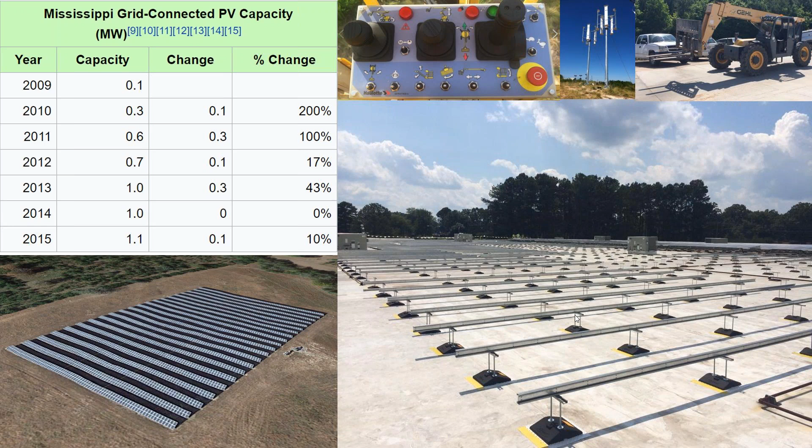Just some background on myself. I got into solar in 2008 in residential contracting, in a market in Austin, Texas that was kind of gangbusters. This was in the era of what I think is probably excessive solar subsidization.

As a case in point, one of our customers did a residential project in Austin about 4 times as big as the solar array pictured, like an 11 or 12 kilowatt array back in the heyday of solar subsidization. We sold the array for about $75,000. The city of Austin cut a check to the homeowner for $48,000, and the array with a 30% tax credit came with a $22,500 tax credit. So out of this $75,000 project, the customer really only paid about $5,000. When you look at the asset value alone of the array, that customer received a return on his investment before the solar array generated a dime of electricity.

In the solar industry, we would call that an easy sell, but it's also too much of a good thing. What happened in the city of Austin back in that era is they would open up their rebate program for one day only, and it would be a mad rush to get in an entire year, maybe a year and a half's worth of projects. You'd have to have it all wound up on January 1st. And if you didn't shove the application under the door at the right time when the clock struck 8 a.m., you might lose out on a year and a half worth of business.

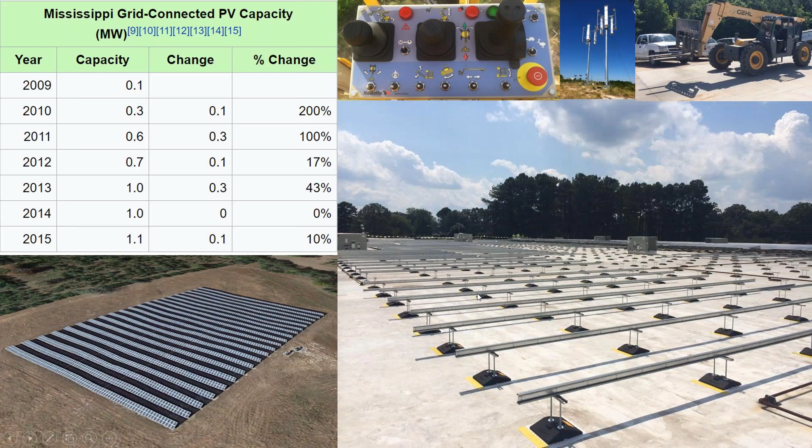And then when we understand the circuitry, we'll realize that most mainstream electricians are already familiar with the hand skills and circuitry involved. So it's really the design phase of solar that has been poorly neglected due to this subsidy process. In order to transition the solar industry from a specialty, turnkey, high margin scope into something that is just installed on all homes to recoup your electricity use over a long period of time, wrapped up into your project financing so that it's cost effective...

To do all that, especially with these rising import tariffs, we have to make solar cheaper. We have to work harder. And so to do that, we have to take a dedicated look at solar design.

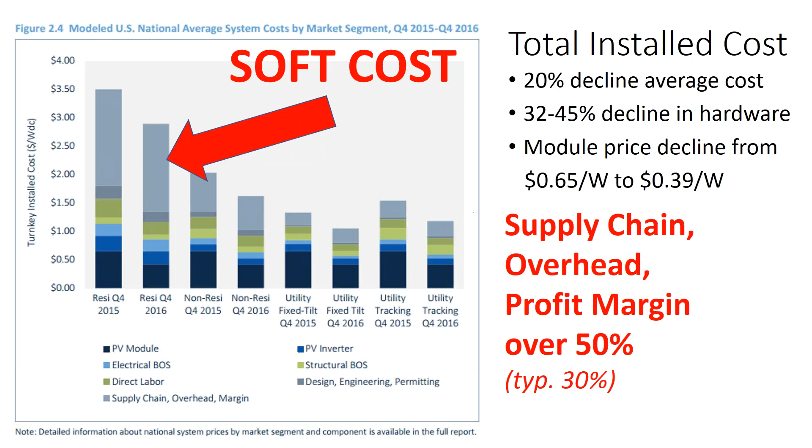The first is the impact of the tax credit. The tax credit was originally supposed to expire at the end of 2016. So what was thought was that developers would take projects out of 2017, 18, and 19, and maybe even delay some projects in the years leading up to it, and install everything in 2016 to get that tax credit and take advantage of declining material costs as well.

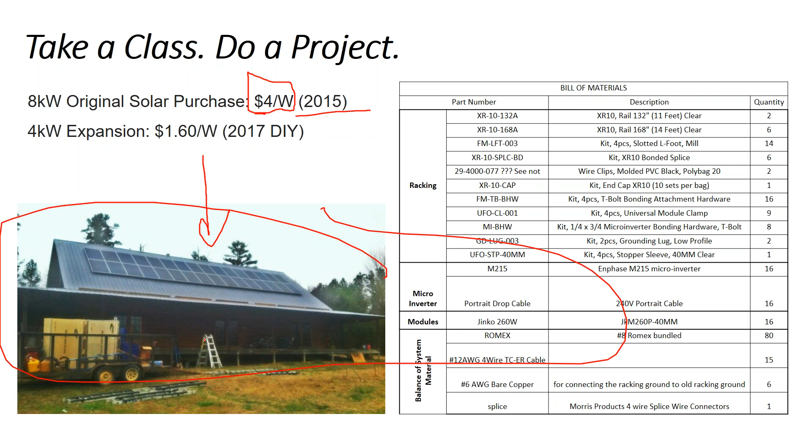At the same time, the guy who owns this array is very handy. He built his house as a kit, installed his own air conditioning system. So he said, well, I only have the money to do an 8 kilowatt project, but I have the electricity use to do a 12 kilowatt project. So can we design the array for expansion?

What we did to make the array expandable is we designed it as if there were another row of modules, so we left enough space for expansion. When we did our internal conduit run back to the point of interconnection, we sized the conduit and the breakers. If you were really fancy, you'd just go ahead and run the cable up to the roof for that expanded circuit. We didn't do that, but by making sure we had the breaker slots, the conduit sized, and the conduit run accessible for a retrofit, we were prepared.

A few years later, the owner called me - I was no longer working for the electrical company. He said, I want to expand the array. I went over to his house and we came up with our material list. It was a little bit hard because we were a few years out, so we had to go back and find modules that fit the aesthetics of his original array.

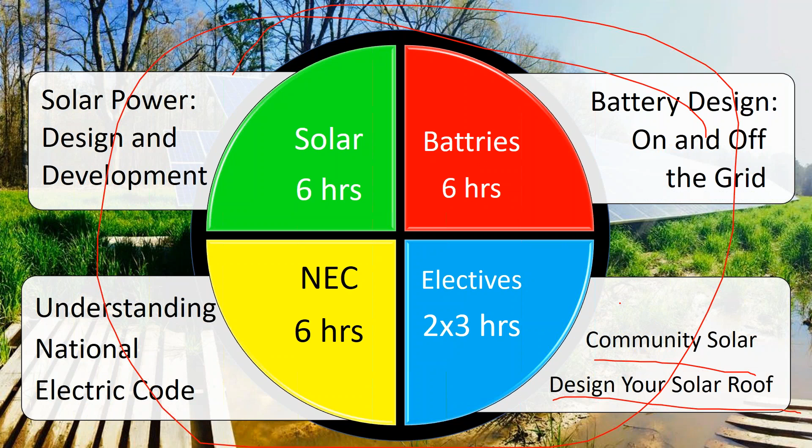To be perfectly honest, after I went through 4 years of mechanical engineering at the University of Pennsylvania—they have a robotics lab that's really good, not quite as good as MIT or Caltech or the real electrical engineering schools, but they get their DARPA-funded robots, and they do drones and computer recognition and all that.

And I got my job in the oil industry as a control systems engineer, designing control valves, but it's still very basic electrical scope. I still at that point did not have a fundamental grasp of what exactly a volt was or what exactly an amp was. And I didn't know anything about National Electric Code, so maybe I could do array layouts and get everything to match up. But while you can teach yourself general PV system knowledge, it really takes working in the trades to have a great grasp and comprehension of National Electric Code requirements and the theory behind it.

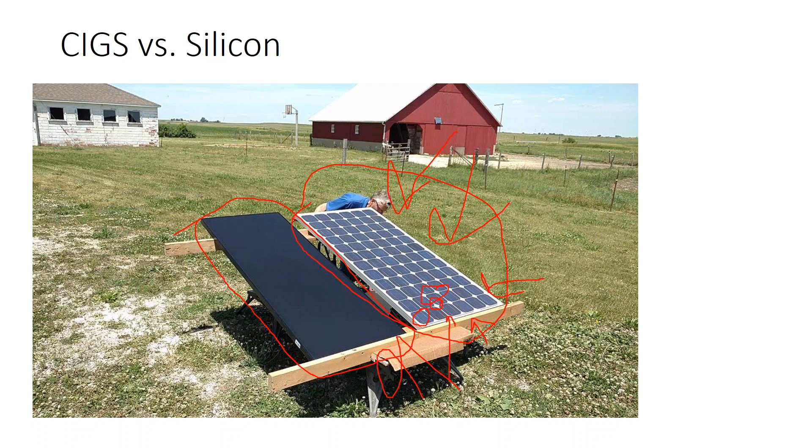You have this silver frame, blue cells, and then a white supporting substrate, which is a plastic sheet. Instead of a silver frame, you could have a black frame - it's anodized silver, but can be anodized black for hardly a difference in price. Instead of a white back sheet, they can have a black back sheet, and what that effectively does is hide the cells. We'll show a better picture because this one is kind of misleading. The CIGS panel is a more universal cell going all the way from the top of the module to the bottom - it's just that silicon has won the economic battle.

So we'll talk about some aesthetic differences in just another slide or two. But essentially, when you look at different module technologies, the vast majority of the market is either monosilicon or polysilicon. The difference being with monosilicon, where you have these cells - it's a little confusing, but you get a cylinder of silicon. And this is not actually a cast in place ingot, it's actually a crystal, like growing a crystal in your bathroom at home, a science kit you would play with as a kid.

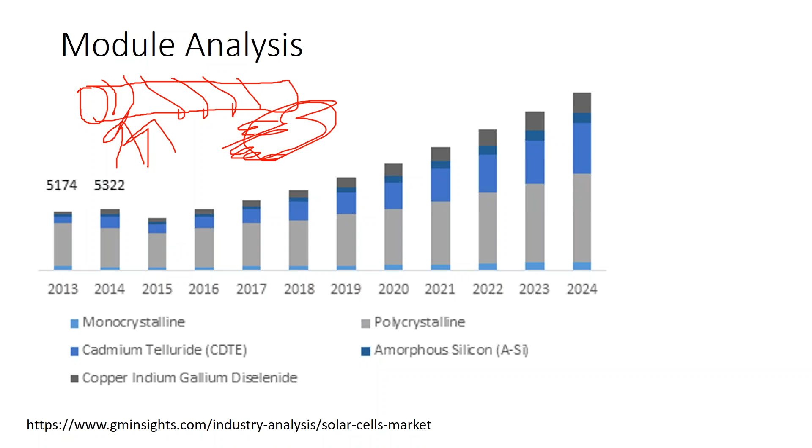This is a vat of liquid that has some stripped out silicon ions into it. In your upstream refining process, they grow a single uniform crystal of silicon, and then they slice it up. That creates a very pure cell, which is great for quality and efficiency, but it also produces a lot of sawdust, so that's not particularly good for cost.

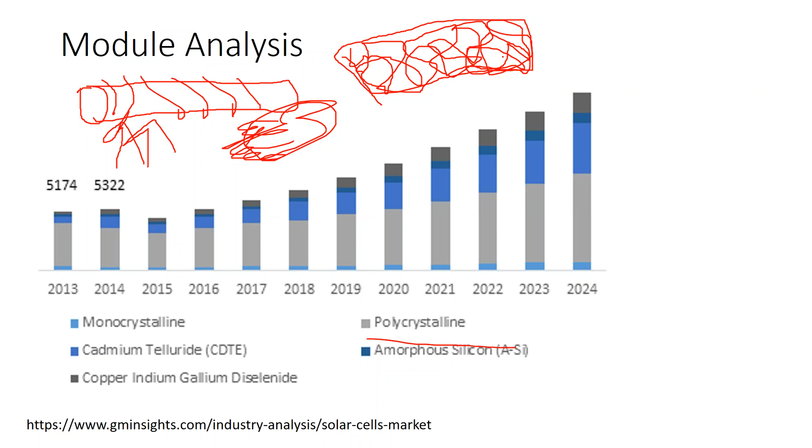Polycrystalline is a little bit different. The vat of ions that they use to grow the cell is actually a sheet or a tray, and the silicon just kind of grows in a square sheet, but its grain boundary is all random. So they might have a fleckled appearance, usually a lighter shade of blue, and they're just slightly less efficient than monosilicon.

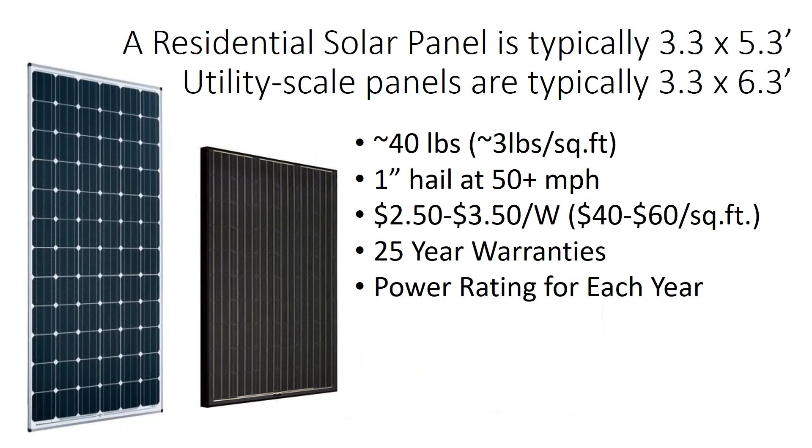But then again, when they slice and dice the sheet, it's more like a square pizza instead of a pepperoni, so it's less material waste. Additionally, with a square cell, they get rid of these little diamonds, so they can fill in more space on the module. The end result is the efficiency of polysilicon is not that much different than monosilicon, because even though it's a lower efficiency cell, it covers more surface area of the module. So the net production difference is very close together, and the manufacturing process is cheaper.

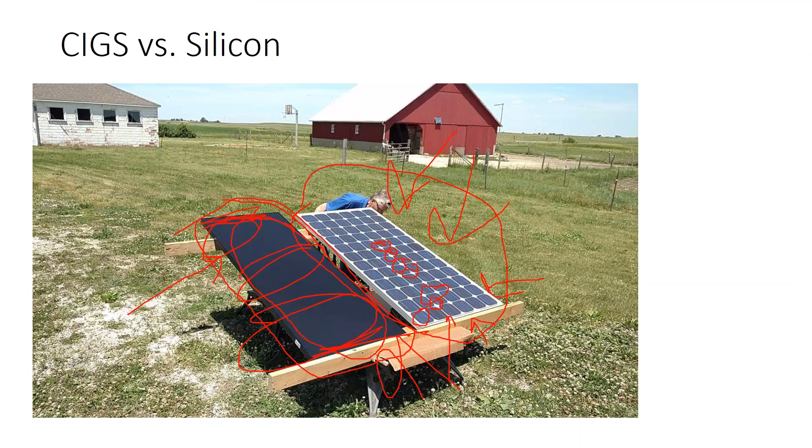Polysilicon is the dominant market, but monosilicon is still catering to what I would say is the United States market, where consumers will be able to afford and pay for a higher quality cell. And then maybe the cheaper polysilicon is what they're buying in Mexico. Because if I'm going to go through the process of doing an import tariff on my module, I might as well go for the most space efficient module possible, the one that's going to be top quality, because if I have to overcome these upfront costs, I'm only going to do that as far as a long-term project goes.

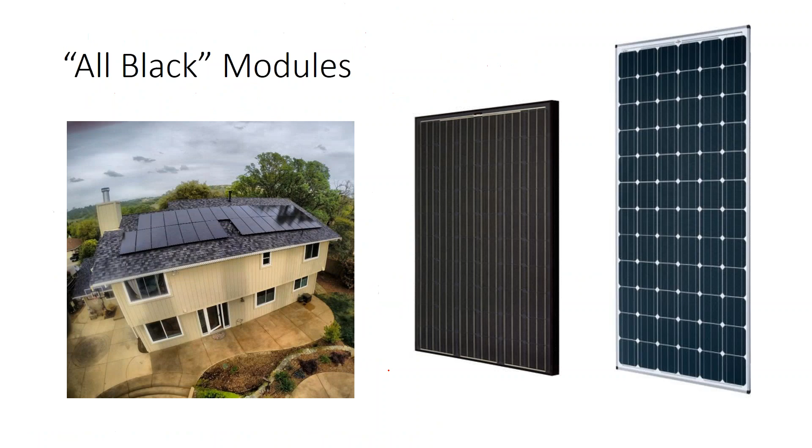I don't really care about monosilicon versus polysilicon versus other kinds of module technologies. What is more important in my mind is aesthetics, which is neglected. I think aesthetics are particularly important for residential arrays because when you deal with 10 or 12 year paybacks, you might have a transition in ownership in the house. Or you might be in a market like Mississippi where the energy savings is so low and the market is so small that the install costs are so high that the national average might be a 12-year payback for solar. In Mississippi, it might be a 15-year payback or even a 20-year payback if you just look at what you spent and the money you get out of it.

Residential home value is not that refined. It's not going to appraise your solar array in the same way that a CPA might assess the cash flow of an investment. Instead, when it comes time to sell your home, the amount of value that the array adds to your home is not the net present value of the remaining electricity left in the array. The value that the array adds to the home is set by what the new home buyer will spend on the home above and beyond what they would normally spend because it has solar.

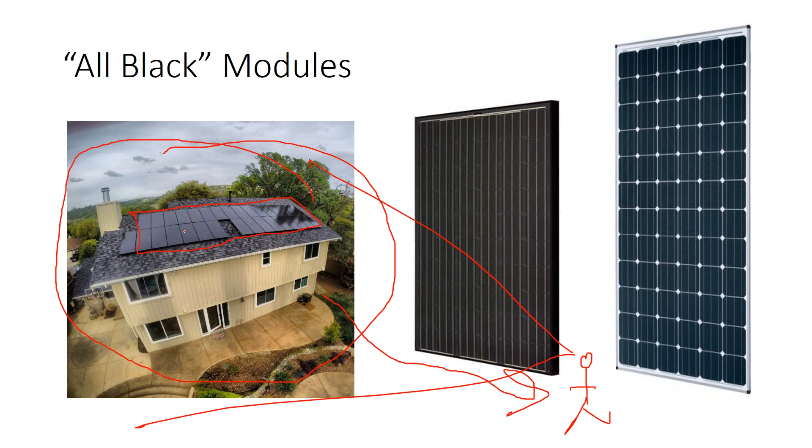So we can see that this designer has tried to do everything right. They got all black modules, they got an all black frame, they have a nice even polygon. But what they missed out on was this black plumbing vent poking through the roof right there - you can see some other black vents. The designer of the home is obviously interested in aesthetics, but the solar designer missed that black vent. So you can see the install - the module was supposed to go there, and instead they kind of tacked it on to the end. So they took what would have been a perfect array and made it look like it needed a trip to the orthodontist to fix.

In general, when doing residential arrays, what's preferred are what are called all black modules, where they take that metal frame and make it black, and take that back sheet and make it black. What that does is it has a muted effect on the metal lines and the circular cells, which you can kind of make out in this picture - they're there, they're just hidden. So generally when I'm doing residential, I'm doing all black modules because it looks better.

Not always - I kind of miss the aesthetics of these monosilicon silver frame modules. They look really good on metal rooftops, with that blue and aluminum, where the aluminum kind of matches the color of the metal of the steel roof. But I'm a solar junkie, I love solar panels, and as they say, black never goes out of style.

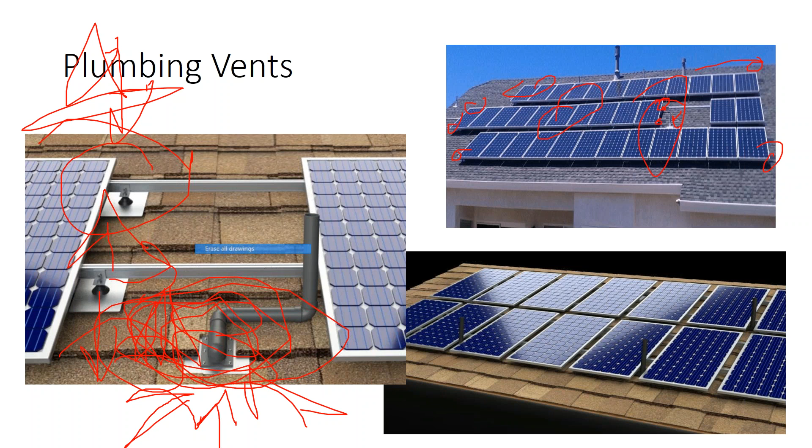So then there's a second reason why we have plumbing vents, and that second reason is that you will have some sewer gas go up the vent rather than down into the sewer. The code on the plumbing vents is such that gas goes up into the air instead of collecting on the rooftop. And maybe instead of going up, it might go down the roof and into a window. So we give this elevation a little bit of distance, a little bit of a gap, to keep it away from entering the building.

Maybe there's a slight corrosive effect that putting a plumbing vent directly underneath a solar module could have on that module. To me, the aesthetics are more important than one module being corroded because of gas 10 or 15 years down the line. If that happens and there's a fault in that module, we'll just replace the module.

No big deal. But on top of that, now there's another option that did not exist before the solar industry. Now we have a vent system where you can cap, flash, and seal this venting system, where you cut the top of the vent off and replumb it out the top of the solar array. Replumbing a piece of PVC pipe up on a rooftop is a very simple task.

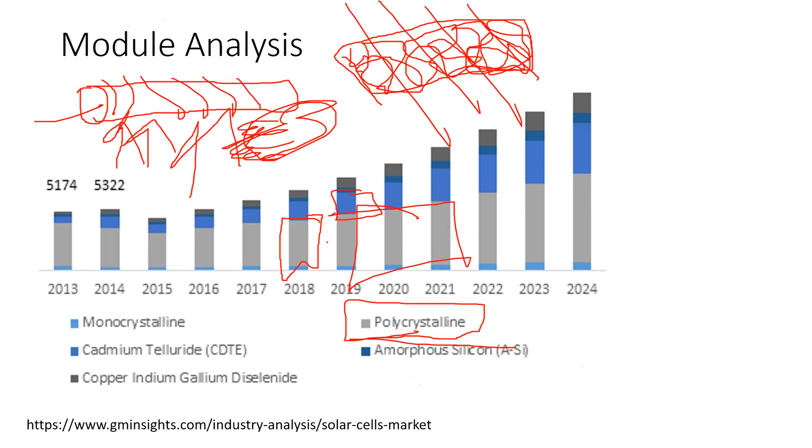All the snow begins to slide. Now you have an uneven weight distribution where there's more weight on the bottom of this array than there is on the top of the array.

So when you're in an area of heavy snow, what you want to do - and we have some slides on this a little bit later, so I'll just state it briefly here - is reinforce the attachments along the bottom of the array. Instead of going every 4 feet, put a new attachment in. On the very bottom row, you may just want to do every 2 feet, so that there's less weight per attachment. Because when you get these heavy snow mounds, the failure is that you get so much weight up on the array that the bottom rail crushes through the roof deck.

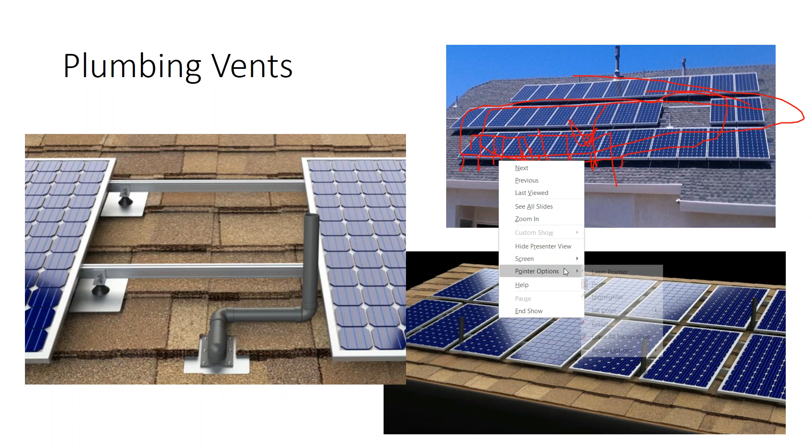That can be easily addressed by just adding a few more supports, which the solar installer doesn't really want to do, because that means higher material costs and more time spent on the roof, and they're not roofers. They're being asked to identify where there are rafters underneath the roof to anchor to. And they know that, unless the building is built perfectly, under a retrofit they're going to be putting down some attachments that aren't going to go into the rooftop.

And that's no big deal when you miss a rafter. You have your sealant gun with you, so you do what you can not to miss. First off,

there's a couple of different techniques, but basically the installer is going to be tapping the rooftop, measuring off 2 feet on center, and then realizing if they got something wrong, because you can feel it. The attachment doesn't bite into the rafter; it bites into the decking, and it'll wobble a little bit more. That's all right - you just remove it, seal it, and hopefully get it right the second time.

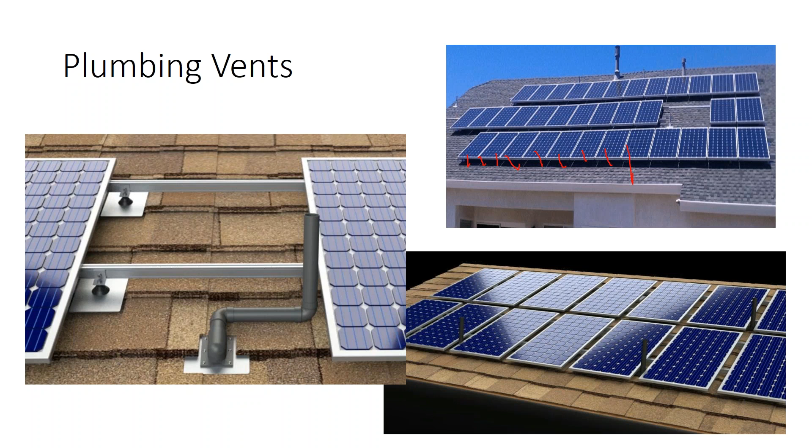But they don't want to do that every 2 feet on center across the rooftop. And because there's very little structural oversight of residential systems in particular, that can get skipped over. Then only in areas of heavy snow does that become a problem.

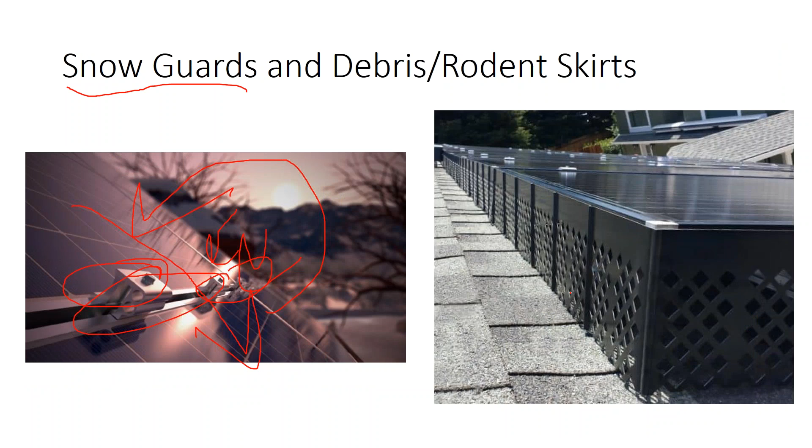Rodent skirts are another thing that your solar project financiers don't want to spring for. It's like, okay, we're doing a $30,000 solar project and the surrounding trees are riddled with squirrels, but you don't want to spend the extra $400 to put an array skirt around the array to prevent the squirrels from getting under there. Some of that stuff doesn't make sense.

And that's where maybe a quality installer can distinguish themselves. Most solar installation companies do not use array skirts. The developer I'm doing projects for, I can tell them in the site evaluations, the customer shoots squirrels off of his rooftop with a BB gun, and they still don't put it into the budget.

I'm working on my own system. It might be that the array skirt systems all come from bird guards, and squirrels are a little bit more industrious than birds. So maybe the array skirts on the market are not very good.

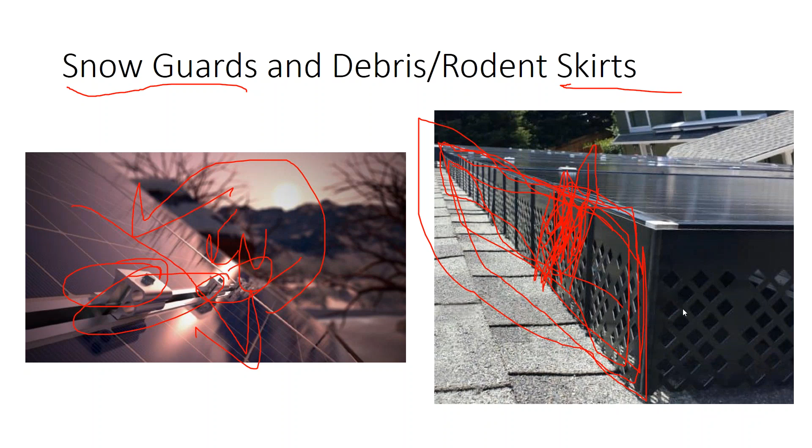What I'm experimenting with is just cable trays, metal screens, locating the wiring underneath the array, and orienting the modules to fully enclose all the roof-mounted wiring and electronics up on the rooftop rather than defending the perimeter. A squirrel might be able to peel one little panel off, and now they have a mansion they can live inside of. So maybe the developer is saying, since we can't fully beat the squirrels, we're not going to do anything about it. There's definitely still some room for product innovation in the industry on that.

But generally, you're going to want to put in an array skirt if you already have squirrels on the rooftop. Well, if the squirrel chews on a wire that's hot, aren't they going to learn very quickly not to do that? Well, yes, but at night there's no power in the wires. They could completely chew up your entire solar array, and I've seen it happen before. It's not a fun process to fix.

Okay, what about the module warranty? I always take module warranties with a grain of salt, because solar is very reliable. The International Space Station is powered by solar, and I'm pretty sure a service call in outer space is quite expensive. So sometimes you can see solar being attacked as if it's not reliable, but solar is very reliable. The sun is going to be here much longer than the Earth, so we know the sun is there. The weather, the volatility of production can vary, but the reliability of solar is very good.

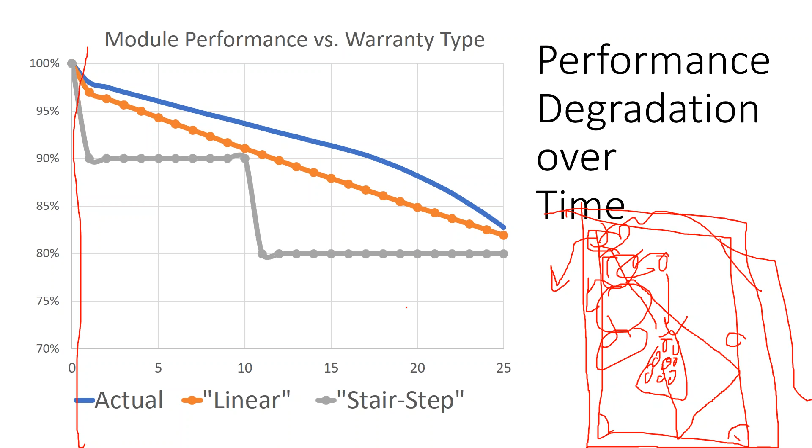Not enough to electrocute you, not enough for you to notice, but enough to drag down module performance over time. So manufacturers have not only put in a bigger gap between the cells and the module frame, but they've also fixed the inverter grounding, so the degradation is not as apparent as it used to be. In your worst case scenario, solar modules installed from 2008 to 2014 would see as much as a 5% loss in the first year.

And the way we wire our modules, sometimes that 5% loss in one module can reduce the whole system by up to 5%. So a lot of that year-one degradation has been addressed.

Now from year 2 to year 25, you have a different kind of degradation, and that has more to do with the build quality of the module, how weatherproof it is. Even if you have a module with a glass top and a plastic back with the cell wedged in between, versus a glass top and a glass back with a thinner cell, that's a tighter build quality.

So they say our thin film modules are more weatherproof than our silicon modules, and so they'll have less degradation. That can be true until they eventually begin to degrade. And sometimes if something's supposed to be weatherproof and it isn't, at that point it can degrade faster than something that's a little bit more breathable.

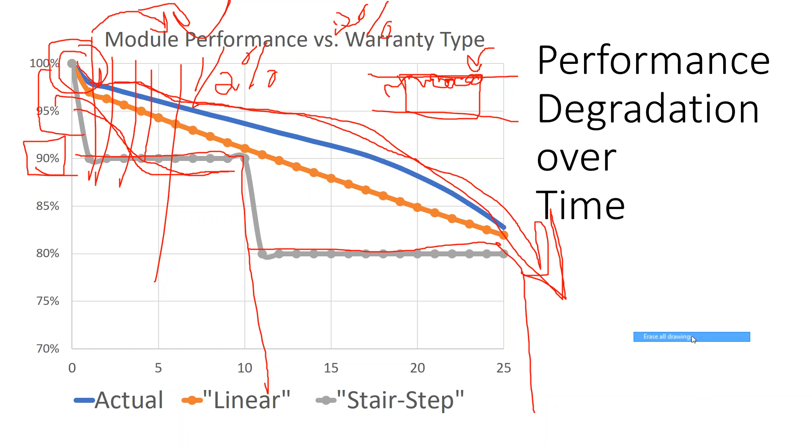Because I guess the danger is this year-one degradation where if your module degrades by 5% in the first year, but you only have a 90% year-one warranty, you're not going to be able to service that warranty until year 8 or year 9 when that degradation finally dips down below where it's supposed to be. And that's really, not only is that tedious, it's incredibly rare. So it just doesn't happen.

So when I'm looking at module spec sheets and I want to determine which manufacturer has better finances, which manufacturer has a better product, generally I'll look at the warranty. And so if they give me a year-by-year-by-year warranty, that makes me more comfortable. I say, okay, well, if there is a problem, I don't have to wait until the manufacturer is out of business for it to trigger the warranty.

But again, it's almost doing you a disservice to spend time on this stuff, because most of the time the warranty issue is way off the chart, at like two-thirds of what the module should be doing. So whether or not you have a year-over-year warranty or more of a stair-step warranty, on the one hand, it indicates quality. On the other hand, the warranty really doesn't matter that much, because in almost all cases either a stair-step warranty or a year-over-year warranty is going to be perfectly fine to have the warranty event trigger.

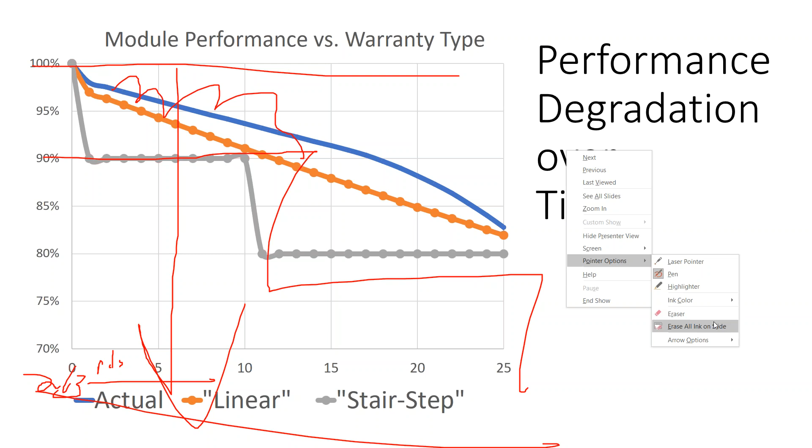And then it becomes just a problem of, well, is the premium for the premium module actually worth it? If you're really never going to use the warranty anyway, it's just going to be cheaper for all parties involved to have one extra solar module in case something happens to one module. If something's happening to all the modules, you're going to scrap the array anyway. So how you economize the warranty, you have to take that with a grain of salt.

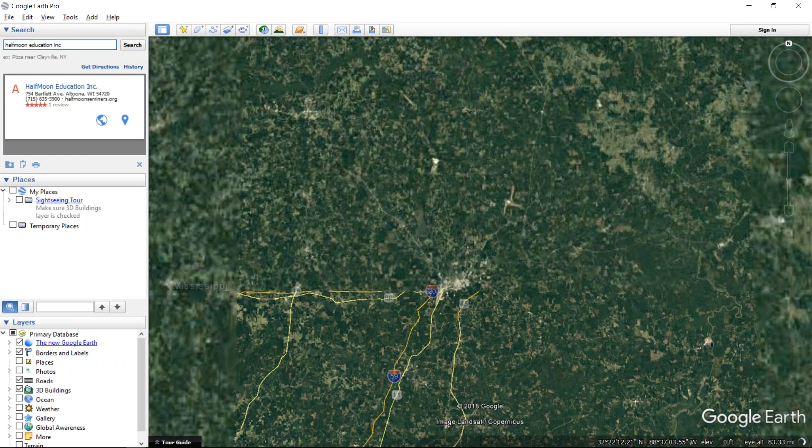Just as an example, here's Google Earth, and we'll put in HalfMoon. We'll go over to HalfMoon's project site, and Google Earth is very accurate. I can look at this roof and say, okay, here's a little penetration, a little vent here. If I wanted to know how big these skylights are, I can take the ruler tool on Google Earth and click there and click there, and that's about a 3-foot skylight or so. So I can measure how far from the edge of the roof the skylights are.

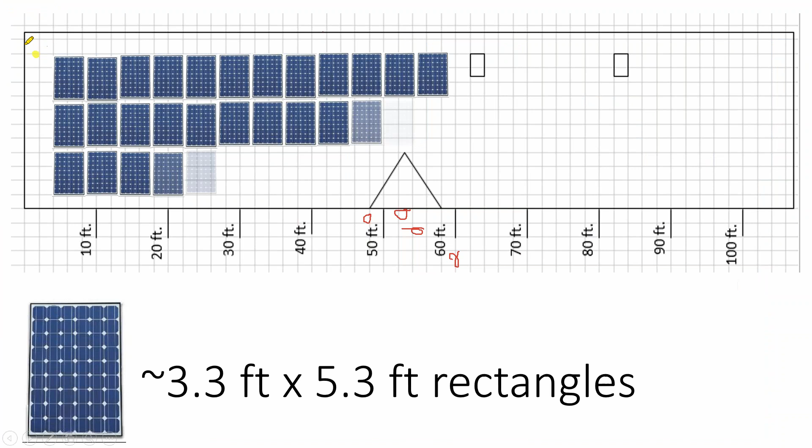I can measure and say, okay, this roof surface is 107 feet long. The entrance to the building is 52 or 53 feet from the left, and the building is about 53 feet from the left and about 54 feet from the right. You can measure out your roof dimensions, but because we're staying away from the edge and giving ourselves a little wiggle room, even if your dimensioning on Google Earth is off by 6 inches, if you give yourself space, it's going to fit.

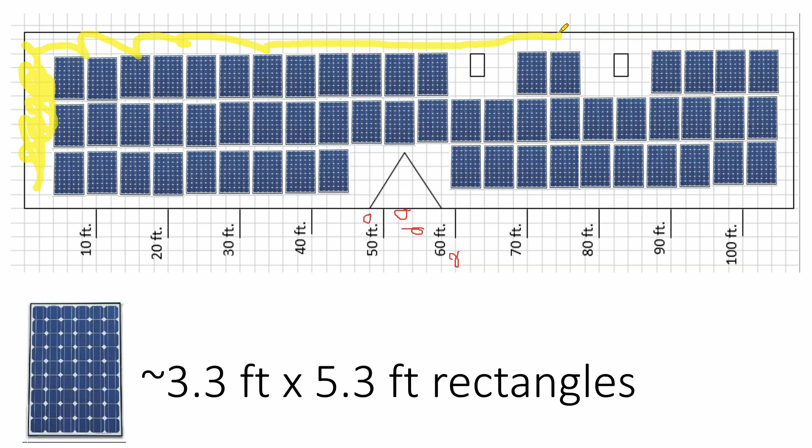If you're trying to use up every single square inch of rooftop, it might not fit and you might cause a mistake. So I really like using Google Earth. I'm a big fan of remote site evaluations, not visiting the site until I'm ready to construct. Google Earth, as long as you're not being aggressive in your design, is perfectly sufficient for that.

I like using Google Earth to estimate tree height. How do you do that? In Google Earth, not only can you measure out the roof, you can measure the length of a shadow. We can see pretty readily that with the HalfMoon site, there are no trees around, but we might want to say, how tall is the building? I can see the length of this shadow here. In terms of building height, I can even see that this part of the building is a little bit taller than that part, and that shadow is a little bit longer than that shadow. So how do I convert shadow length to the height of the building or a tree?

Down here in the bottom, I can't really make it any larger, but I actually get the date that this image was taken. So if I turn on, Google has a 3D view for 3D buildings. I'm not sure why, but usually when I click this 3D layer, it changes things. Let's take it off and put it back on. I guess that's a moot point.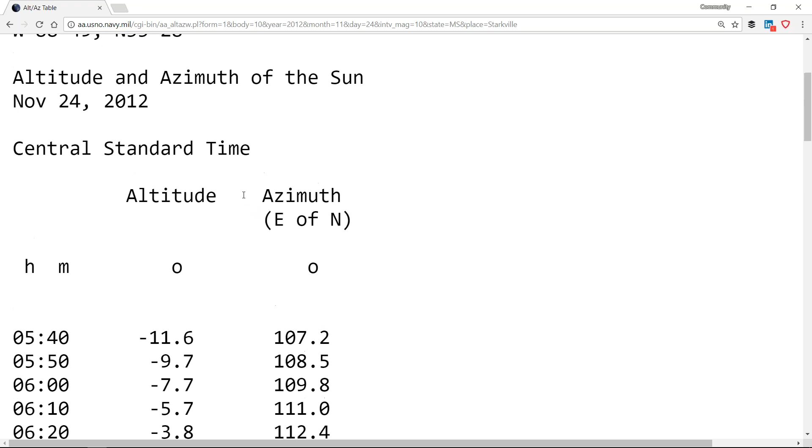I've measured the shadow to be 80 feet long, then I'll go to my sun angle azimuth chart and put in the date the Google photo was taken, November 24th of 2012, and put in where I'm living right now, Starkville, Mississippi. I'll click compute table, and here's a chart of where the sun is for every 10-minute interval in Starkville, Mississippi on that date.

So if I know that my bearing is 160 degrees, I'll look at my sun angle chart and scroll down to 160 degrees. This Google Earth photo was taken at 10:30 a.m., and the sun was 33 degrees up in the sky at that time.

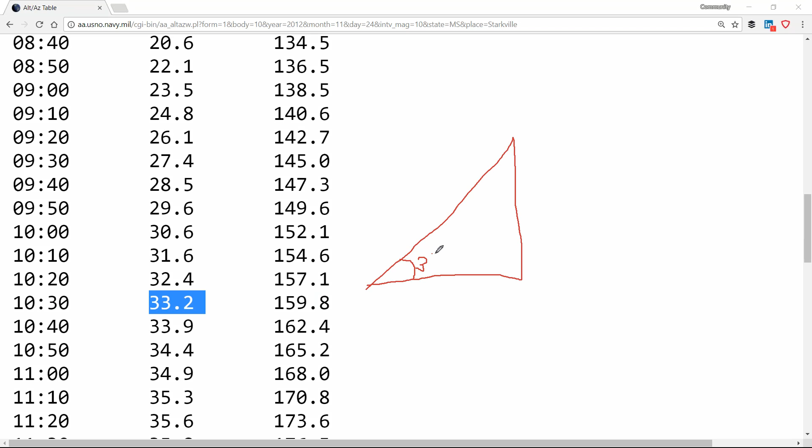If I know that this angle is 33 degrees and my shadow length is 80 feet, I can get the estimated height of that tree, and then add some additional footage to account for future tree growth. Knowing what the tree is, knowing the height of the tree, all that stuff could assist your model and make it more accurate.

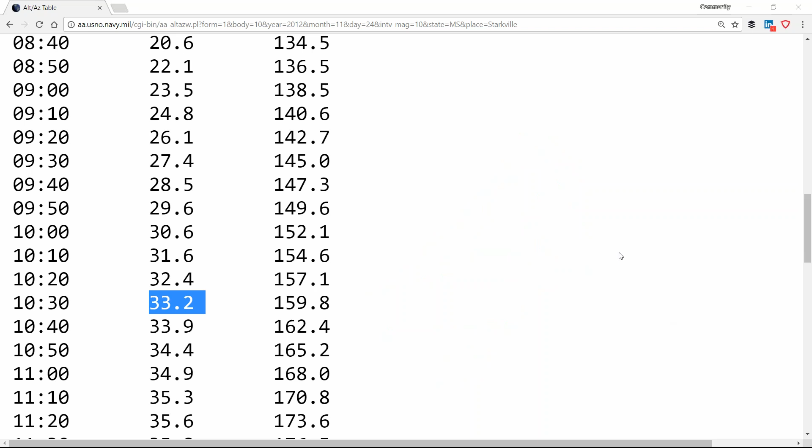But the fundamental is, here in Mississippi, I can determine the height of nearby trees just by using free online resources that are available, without even getting into commercial modeling software that does all this stuff in a more automated fashion, which we'll get into.

Coming back to our array layout, we need to be aware of fire code, and there are exemptions to this. In fact, in New Jersey, the fire marshal says we're not sending our firemen on top of the roof of any home that is burning down. Firemen will get up on the roof and cut a hole to ventilate smoke out of the building.

Now, there are other ways you can do this, and perhaps the smart home way is in your attic you put a fan, called forced ventilation, and you force the air out of the attic rather than cutting a hole. If that's not part of your backup power system, that can be a little hard to do during an emergency. But you can get around this fire code rule.

So this is not a hard, fast rule. You can go all the way to the edge of the rooftop if you have a forced air ventilation system, or if you're in New Jersey, or if you get approval on your permit and the local inspector knows it.

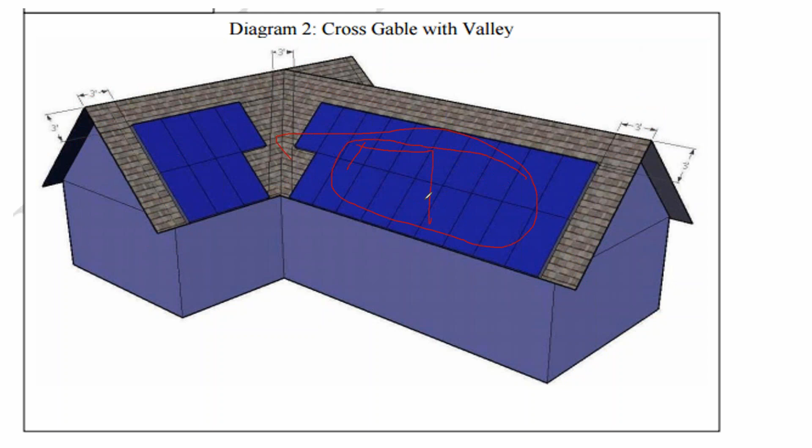Finally, we look at structural elements: the corners of your rooftop experience higher wind speeds than the edges, and more than the interior of the roof. So if you go all the way to the edge, your racking system may require closer attachment points rather than further apart ones. A common design mistake is using very non-conservative attachment foot spacings—that might work for an array on the interior of the roof, but might not be within spec if you go all the way to the edge.

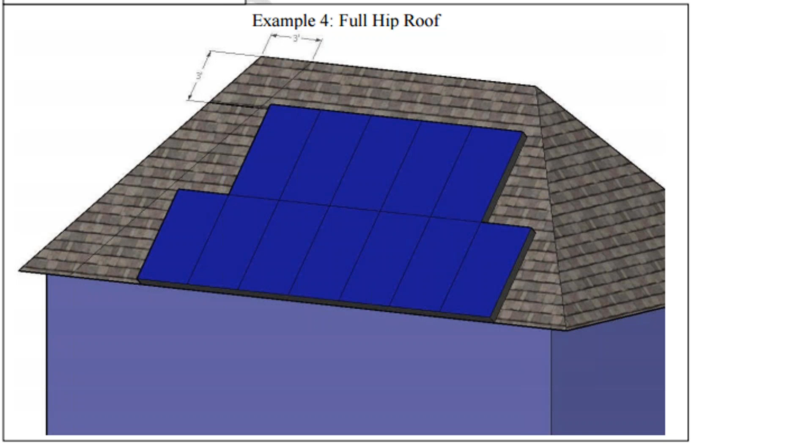If you want to know more about the fire code, research California Solar Fire Code, because California is out front in setting policy, and most jurisdictions' policies eventually trickle down from California. The California Fire Code goes into the justification of why you go 6 feet to the edge for commercial installations.

And this is important stuff to know. The California Fire Code says every 150 feet, you need a walkway. Well, the Half Moon building is only 120 feet, so I don't really need a walkway halfway through my array. But if it was 150 feet, I would.

You might have the opinion that's just California liking to regulate things. But actually, that 150-foot spacing comes from field experience, where arrays covered the whole roof without a walkway, and you have this interconnected steel frame on top of interconnected aluminum frames, and furthermore copper home run conductors weaving through the array on a steel or aluminum rack. When you have copper on the roof, in conduit that's in steel or underneath an aluminum metal solar array, on a rooftop subject to hot temperatures, once you go more than about 150 feet, the thermal expansion of the racking system can pull the conduit apart, and that started fires.

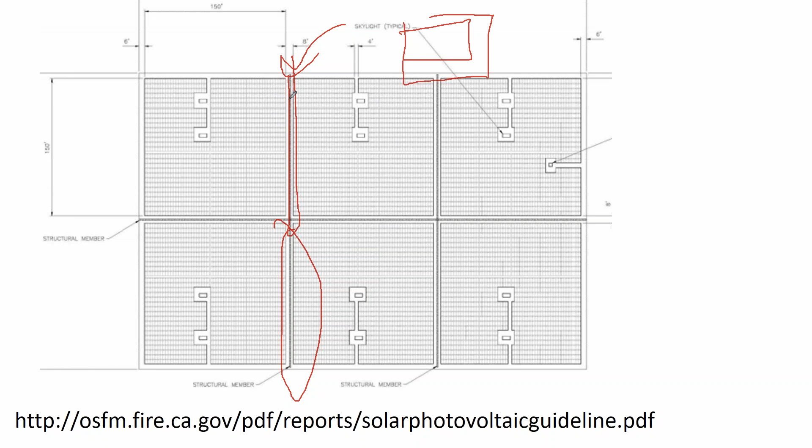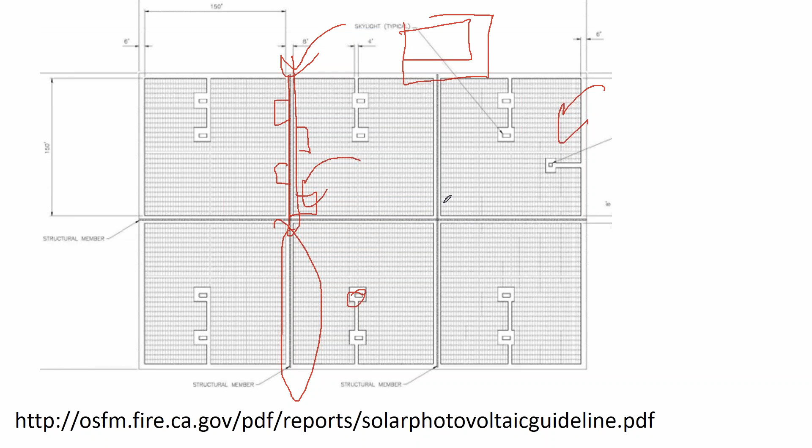So when doing commercial arrays, you need to think about walkway spacing. California Fire Code says every 150 feet, you need an 8-foot walkway. The 8-foot width is because firefighters on commercial rooftops don't like to cut a 3-foot hole, they like to cut a 4-foot hole. You can actually get away with a 4-foot walkway if every 20 feet you do a little cutout sufficient in space to cut a 4-foot by 4-foot square. Your other electrical equipment, like roof-mounted air conditioners, also need 4 feet of accessibility per commercial code. So it's 6 feet off the sides, a walkway every 150 feet, a 4-foot clearance, and maybe an 8-foot walkway, with a little wiggle room.

So just Google California Fire Code to find these walkway rules. But basically what we've done here is sketch out the rooftop on Google Earth, staying 3 feet off the sides, 3 feet off the top. Yes, it's a commercial building, but the runs are less than 150 feet, and it's a slanted roof, so this is a residential type roof—we're going to use the residential offset requirements.

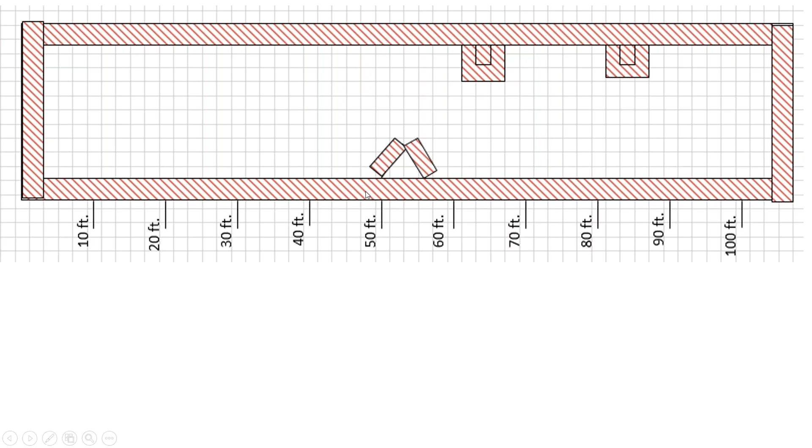And then it becomes, well, how many modules can you fill into this larger polygon? Now, the only thing I would have done differently about this design is that we installed the array, and then a few months later, the skylights began to leak.

That was because we had turned the areas around the skylights into walkways by keeping them excluded from the array, so that when we were working on this portion of the array, our workers were tromping around the skylight. What you need to do is, any flashed roof penetration near the array, you have to go reseal that flashing, because you're probably going to be busting the dry caulk that's already sealing that 10-year-old roof penetration. You want to make sure it gets resealed.

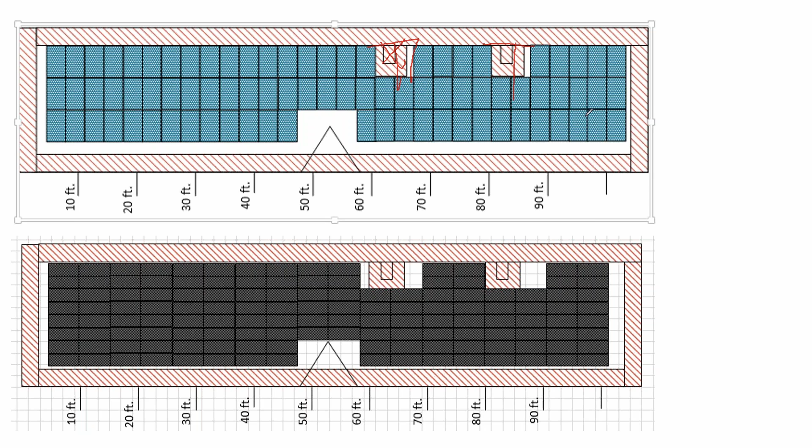Now, what we did in this case is we actually went and removed the skylights and put in more modules, to make the array look much nicer from the street.

All right, let's talk about racking. A couple of different components.

When I got into the solar industry, these are my project photos. The solar guy who trained me up—I still have incredible respect for him. We kind of went our separate ways after the subsidy programs in Texas began to crash too regularly to sustain business. It was a good deal for the customers, not really a good deal for the installers, and that turned out to be not a good deal for the customers 5 years later, because the installers were all different, other people trying to get into the game. What this guy did is go into the off-grid market, and he's a great tiny house off-grid distributor now.

I asked him about it, being a solar guy, an engineer, but that doesn't mean I know anything about building envelope construction or framing or sealing. So I'm asking the solar guru, who's supposed to know everything about solar, or at least is in that position of responsibility, how he seals his penetrations not to cause a leak.

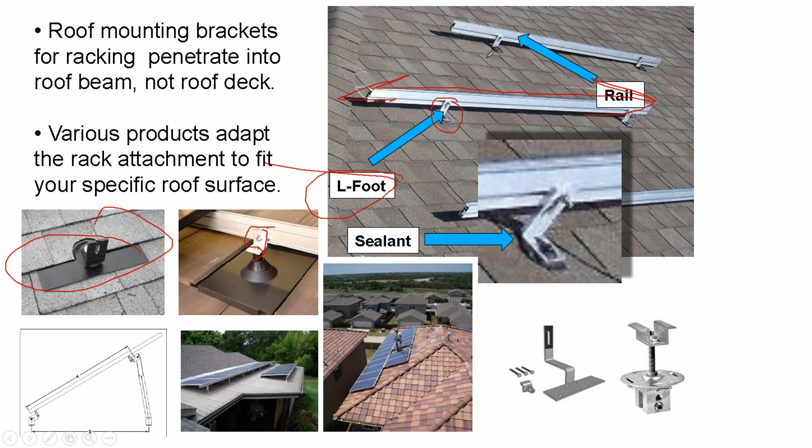But the short of it is, there are racking solutions for every product, and in general, what you have is a little L attachment that gets flashed and sealed, and then you have aluminum rail, and this aluminum rail has a side channel in it that the bracket, called an L foot, gets attached to. The aluminum rail also has a top channel to it.

What we can see in this picture here is that we have a side channel that gets bolted on, an L-foot bracket that gets lag screwed into the roof, a flashed and sealed attachment. This flashing is actually a little bit better than the other ones we saw because it has a little pathway in it for sealant that'll keep the flashing flat. It also has the lag screw decoupled from the solar array so that you get a little bit less torque on that lag screw.

It's a little bit better covered and sheltered. And then on this top channel here you get a clipping system that the modules get laid out on, and the bolt goes down into the channel, and you have a choice of using a hex bolt or a T-bolt.

The hex bolts you can find at Lowe's. The T-bolts are specialty. The hex bolts work, but the problem is you have to start at the end and slide them down the channel. The T-bolts you can just put in and give a half turn, and they lock into wherever you need them to go. So if you don't have any T-bolts or you drop one off the roof, maybe a hex bolt will get you to where you need to be, but it can be complicated because you might not be able to slide it from the end of the rail. There might be other stuff in the way. But we have this clipping system that clamps the modules down onto the rail.

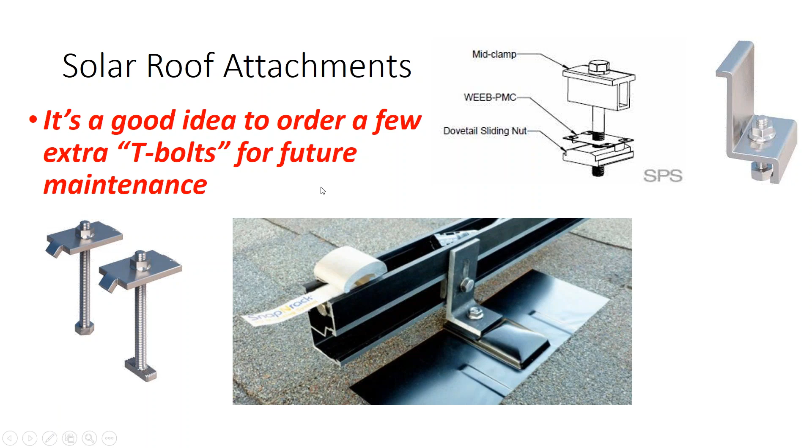Now, there are some variants. Here is a DynoRaxx fiberglass module racking system. And if you combined a fiberglass racking system with a frameless solar module, that is glass on glass and it gets rid of the aluminum frame, it would be very possible to have a commercial solar array with no metal on the roof. So if you're in a high lightning area, if you're building right on the coastline where you get a lot of saltwater spray, if you are building on some facility where there's a lot of ammonia gas that could cause corrosion, there are some alternate racking configurations to eliminate the metal.

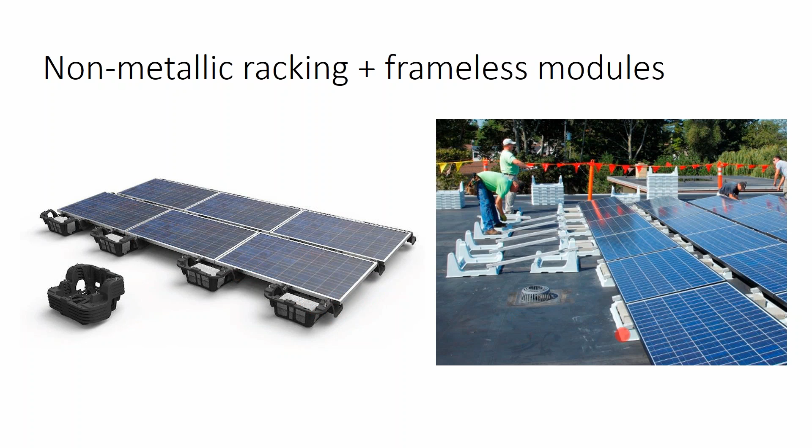This is a ground mount product that goes on top of a landfill, because on a landfill you can't drive piles into the ground. There's a landfill cap that goes over the landfill. So this is just for setting right on top of the ground, which is not the most elegant way to go about doing a ground mount project, but sometimes you got to.

Okay, we've done our array layout. Now we're going to get into racking design. We're kind of getting towards the tail end of class here, so I'm going to go through this racking design real quick, and then we'll close it out and pick it back up tomorrow.

Finish out the program. But now that we've done our array layout, we've decided where the modules are going to go and where they're not going to go, at that point you go to your racking manufacturer's website, and they will have racking sizing tools to help you fill out the rest of your balance of system components.

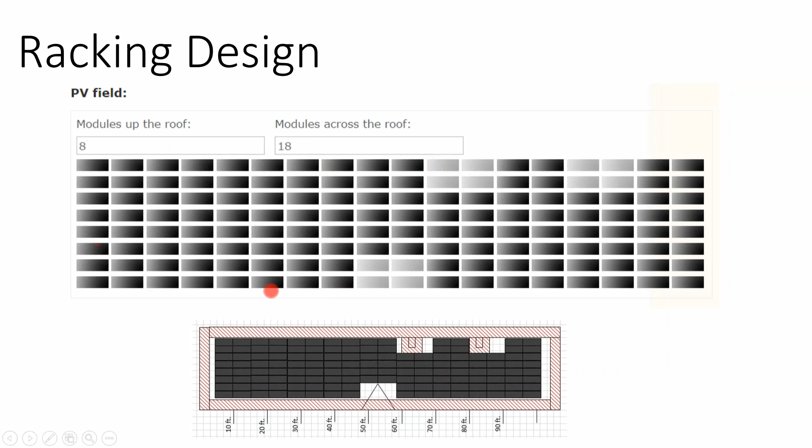So once we know our array layout, here's our array layout, here's the screenshot from the manufacturer's website where we've rebuilt that array in their configurator. And they'll ask you, what's your wind speed, what's your snow load, what's your exposure category, and it'll tell you we have different gauges of rail.

This rail could accommodate a 4 to 5 foot span, depending on if you're at the corner, the edge, or the middle of the roof. Here's a thicker gauge rail where you could have an 8 foot to 10 foot span. But what the racking companies are only looking at is the strength of the racking, not the strength of the rooftop.

And so on Half Moon's array, metal roof, purlins, kind of a barn-like structure, which means that the roof truss is probably not overbuilt.

I called up the racking company and they said, man, you're going to love our new XR1000. The rail gauge is so thick, you can go 10 feet between penetrations. Fewer penetrations, less roof leaks.

And if I go to the developer or the building owner and I say fewer penetrations, less building leaks, they say thumbs up, great. Well, I go to the structural engineer and I say, well, if my penetrations are every 10 feet instead of every 4 feet, the structural engineer goes, there's 2.5 times as much loading on each attachment.

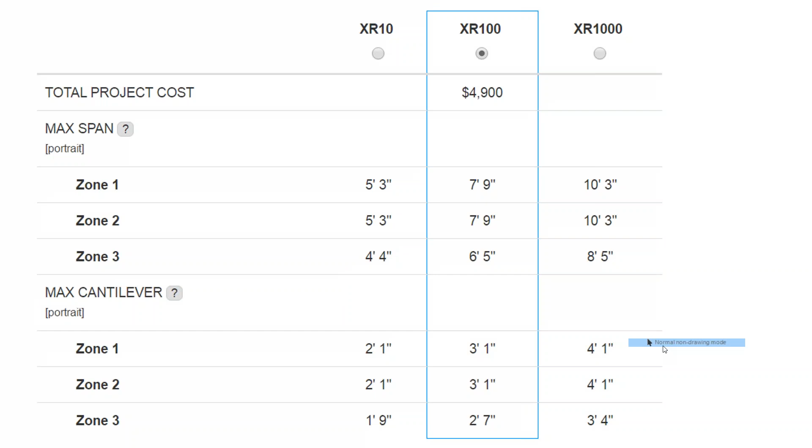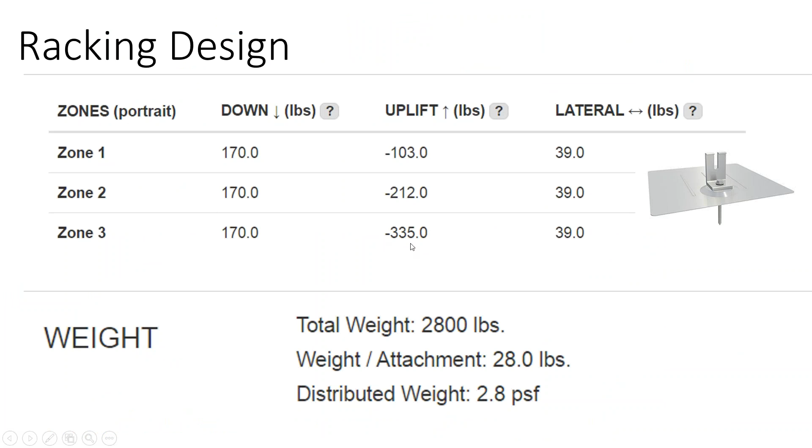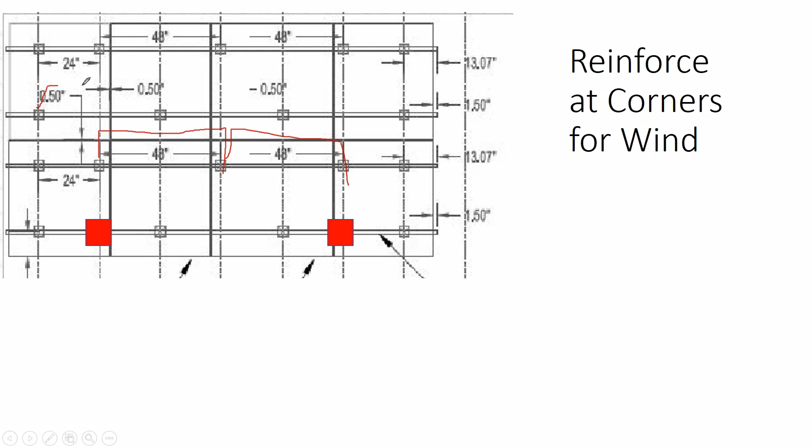We'll cover these slides, but essentially the short of it is, and we'll go back through all this, getting more into loading discussions tomorrow. But the point is, for optimal rack design, you're going with, as a standard, a 4 foot on center span. And then between your rails, you want to stagger that 4 foot span.

Because if your rafters are 2 foot on center, what you want to do is hit every rafter as you go across the rooftop. So here, we're going 2 foot on center, and the next rail up, we're staggering those attachments 1 rafter over.

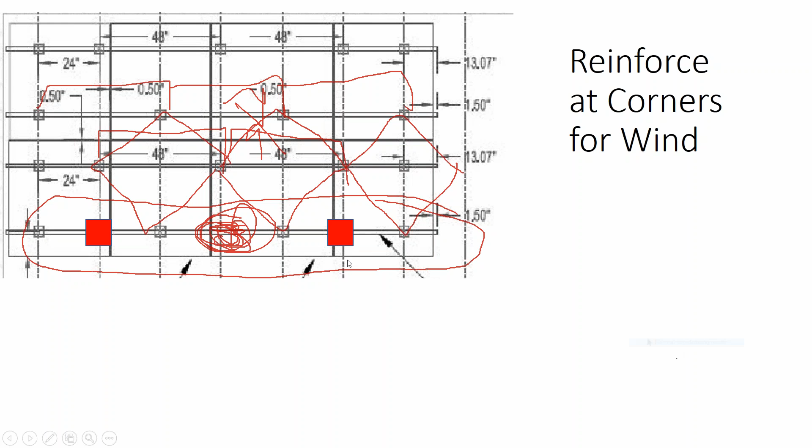And then finally, if you're in an area of heavy snow load, you want to put attachments along the bottom. And then finally, if you're going all the way to the edges of the rooftop, you want to put additional attachments, not just 4 foot on center, but at the corners, you may want to consider 2 foot on center.

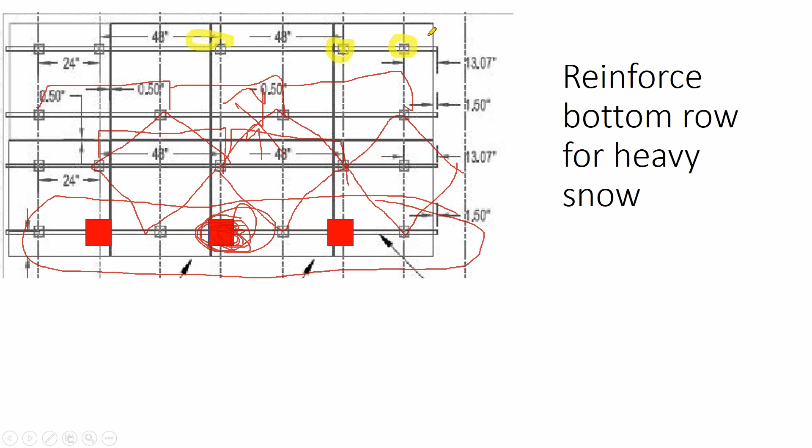And so just as your attachments on typicals on residential rooftops, 4 foot on center, but 2 foot on center in the corners, and then maybe 2 foot on center all across the very bottom rail in areas of heavy snow. That'll get you to a strong residential racking for pretty much all your rooftops except barn metal roofs, at which point you may have to do 4 foot on center. And of course, all of this does ultimately depend on what's underneath that roof deck.